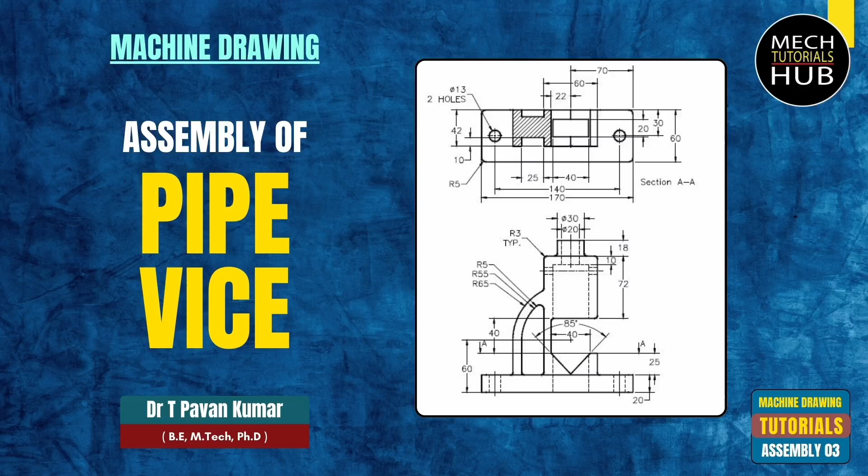Hello friends, in today's session of machine drawing video lectures, I would like to start off with a component called pipe vise, which is very important assembly when it comes to machine drawing.

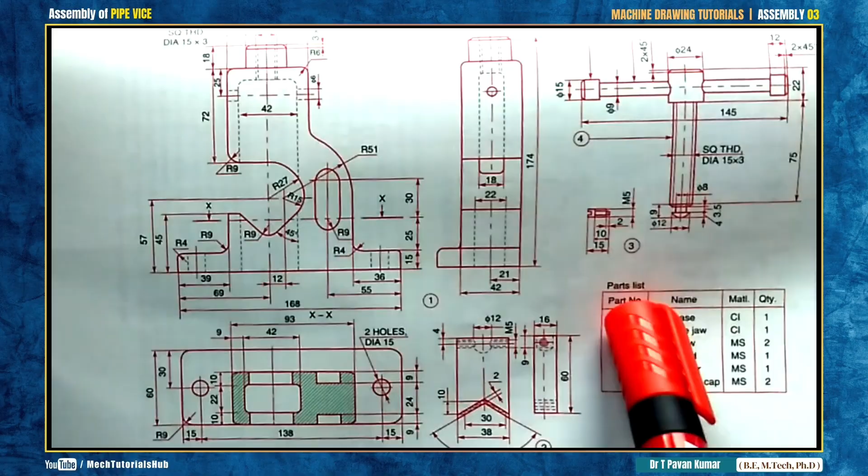Now here you could see the question. All the components will be given to you in the examination. Complete sheet will be given to you in the form of a question with all the dimensions given, even the table also.

Only thing is, the way we have seen in stuffing box and screw jack, what we need to do is figure out how to assemble the components in its working position, which is more important. We need to concentrate on a few things.

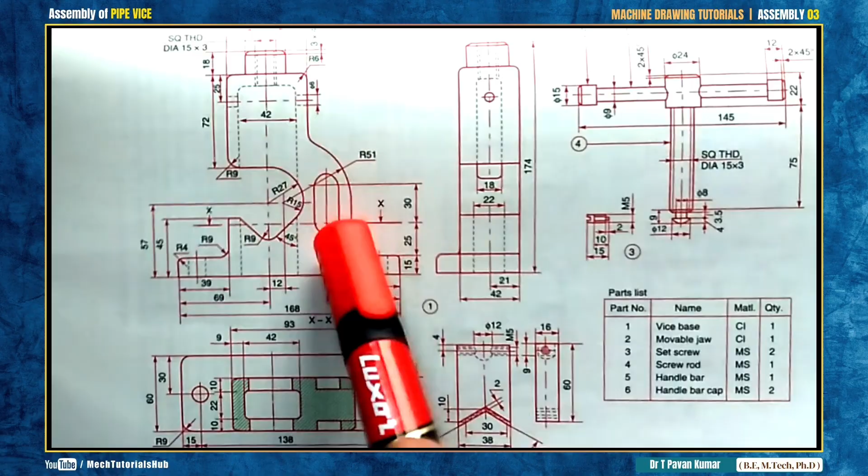Now as I said initially, whatever the assembly may be, we need to draw part number 1 first, which is the major part. Then comes the other parts, which will sit with respect to dimensions in its working position.

Have a look at part number 1. There are many dimensions given, many dimensions, somewhat clumsy. All the dimensions are clumsy.

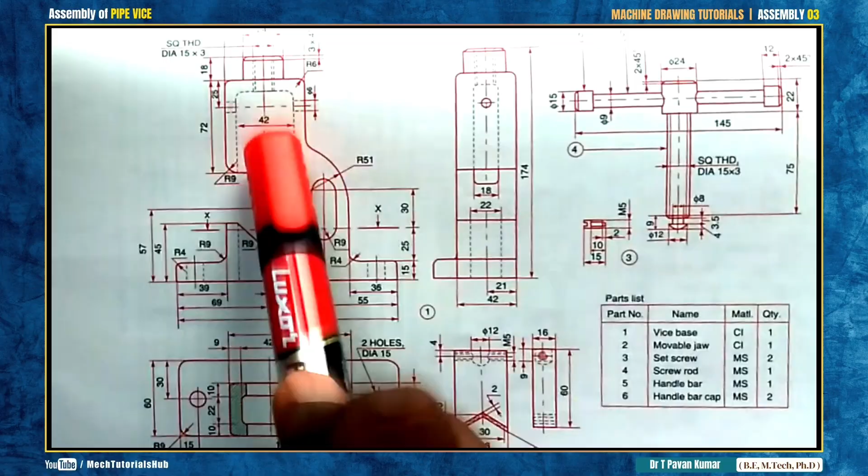So here you could see the internal diameter, minimum internal diameter of 15 by 3 for this component. There is a minimum internal diameter of 15 by 3. Do you have any other component which will match with this particular 15 by 3?

That is more important. Have a look at part number 2, part number 3. Is there any other component which will match with this particular slot?

Now here there is a hole, meaning we need to fix a shaft into it. Do you have any other shaft? Have a look at part number 4.

Now this part number 4 is having a shaft of diameter 15 by 3. This 15 by 3 is again matching with 15 by 3, which is having a length of 75, meaning this 75 is going to insert into part number 1.

If you want, you can insert completely 75, or else it could be some number like 50, 45, 40, 30. It is not compulsory that you need to insert completely 75 inside part number 1.

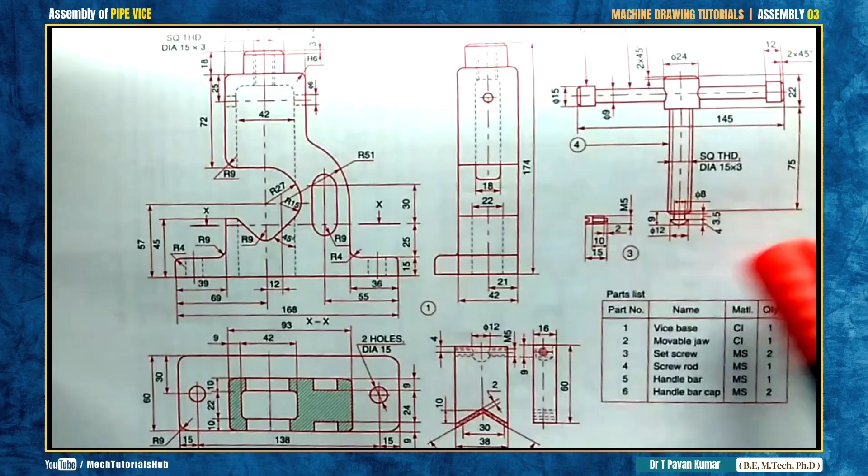And one more thing is, have a look at part number 4, bottom critical portion. Here have a look, there is a dimension called 8 dia, 9 thickness, 12 dia, 3.5 thickness, 4 thickness. Many dimensions are given here.

So have a look at part number 2 again. Now the same dimensions are followed in this case also. There is a diameter of 12, and again there is a thickness of 5, thickness of 4. So these two are matching with each other.

So the profile is also matching. The complete profile is also matching with this particular profile.

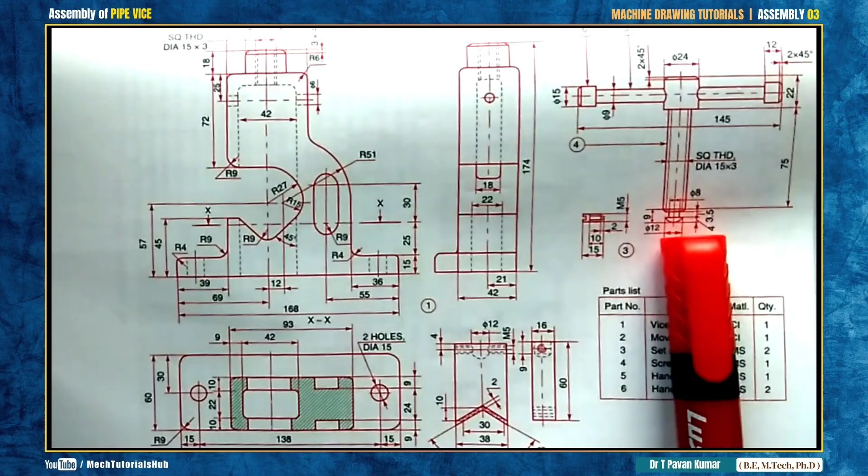So what you could do is take this plate, part number 2, which is the movable jaw. Take this jaw, place it here, which is already inserted inside part number 1. Part number 4 is already inserted in part number 1.

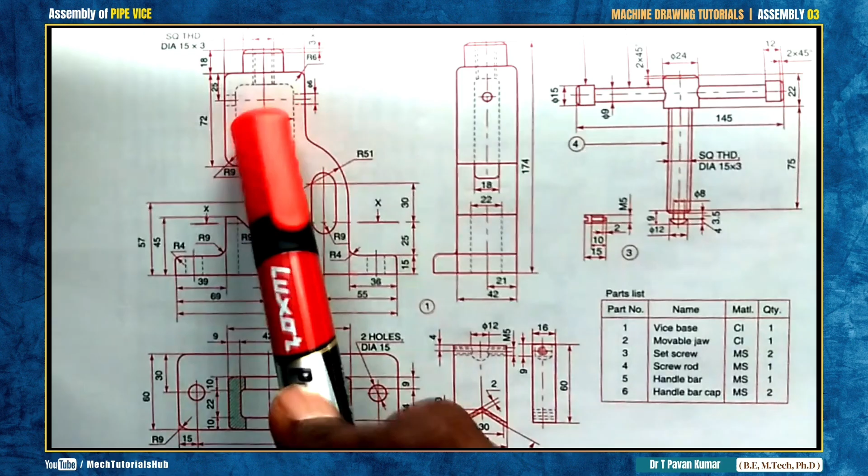What you need to do is take this part number 2 from the bottom, take it up, try to align with part number 4. After aligning, you have to fix it.

Have a look at part number 3, which is a set screw. What is the quantity given? Set screw quantity is 2, so one from this side right, one from this side left.

If you place the set screws, part number 2 is going to fix to part number 4. Try to understand: in part number 1, part number 4 is going to insert.

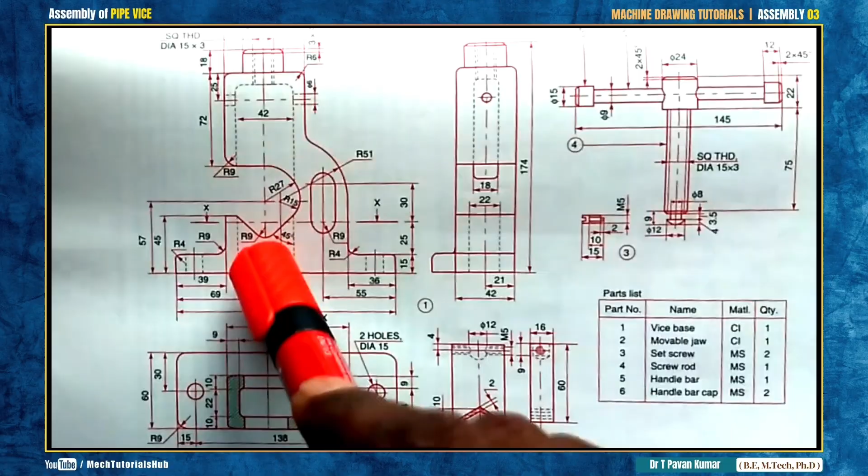After inserting, take this movable jaw, place it from the bottom, align with part number 4, and try to fix these two with the help of the set screw. This is an assembly, this is your assembly.

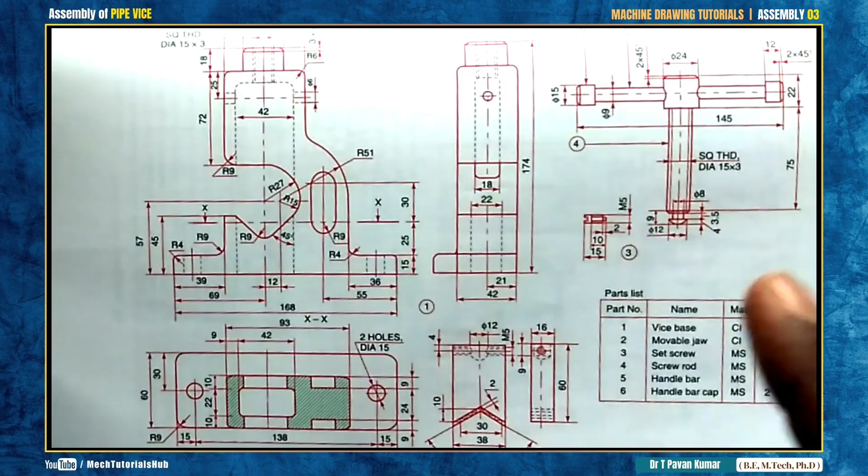Now we use these two levers. You could see a lever in part number 4, where we'll try to rotate it to fasten and unfasten, to move up and down, the way we have seen in screw jack also.

Now here you could see part number 6, handle bar cap, handle bar. These two handlebars are used to rotate, just by holding with the help of hands. If you rotate, what happens? It will come down and move up, where you can hold the pipe, circular pipe, with the help of this jaw.

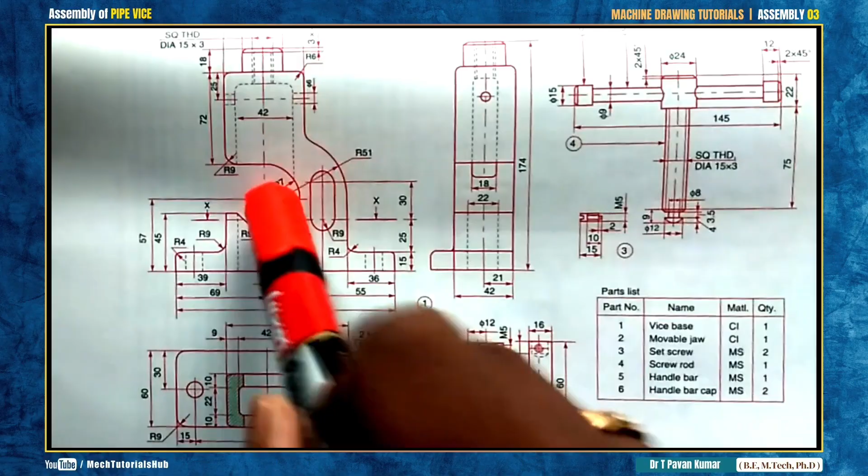With the help of this jaw, you can hold the circular pipe to make threadings or to wind some other thread onto the pipe inserted. Okay, this used to hold the circular pipe.

Now we'll see how to draw this particular 2D sketch, like front view and top view of an assembly. As I said, we are going to draw a pipe vice. Now, I don't go in depth the way we have discussed before.

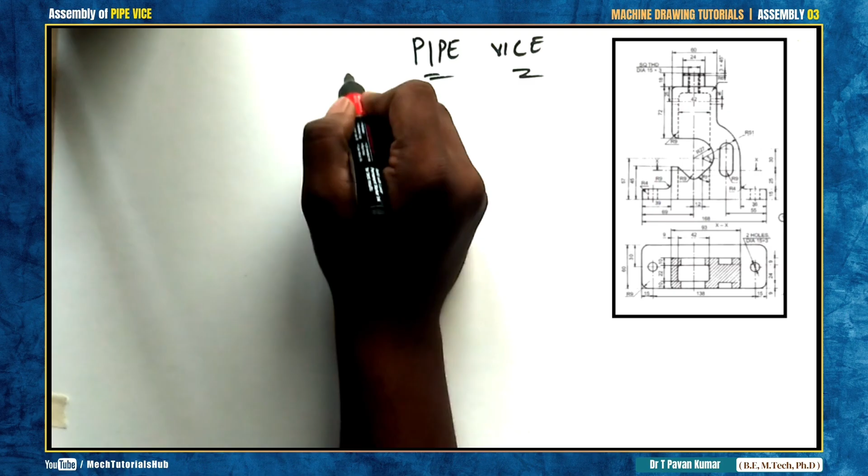We need to draw a vertical axis line followed by a horizontal. Now I'll take part number 1. Bottom one, I'll start from the bottom of part number 1, and place the bottom line over here. I'll imagine that this is going to be the base of part number 1.

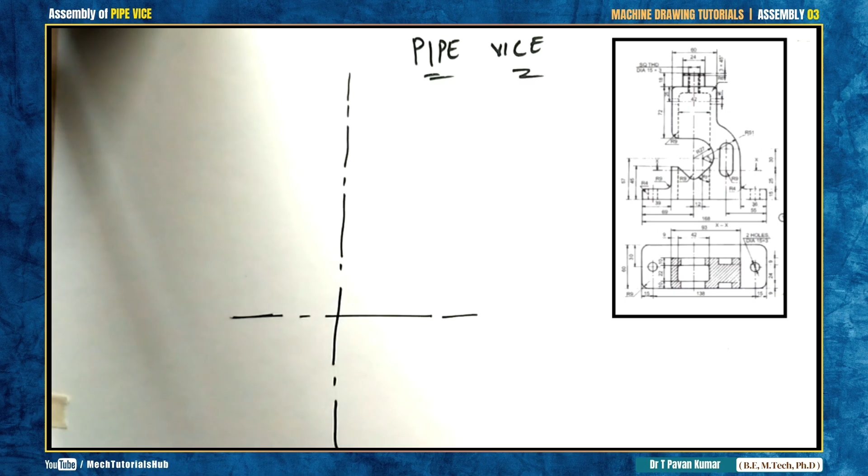The dimensions given are 168 overall width, bottom width of 138, followed by a thickness of 15 mm. So I'll try to split this 138 into 2.

Have a look at the top view, 138 is given. And have a look at the front view of this particular pipe vice, where you could see the axis centrally placed. Is it symmetrical or not? That is a question mark. Now from the left corner there is a dimension maintained which is 69.

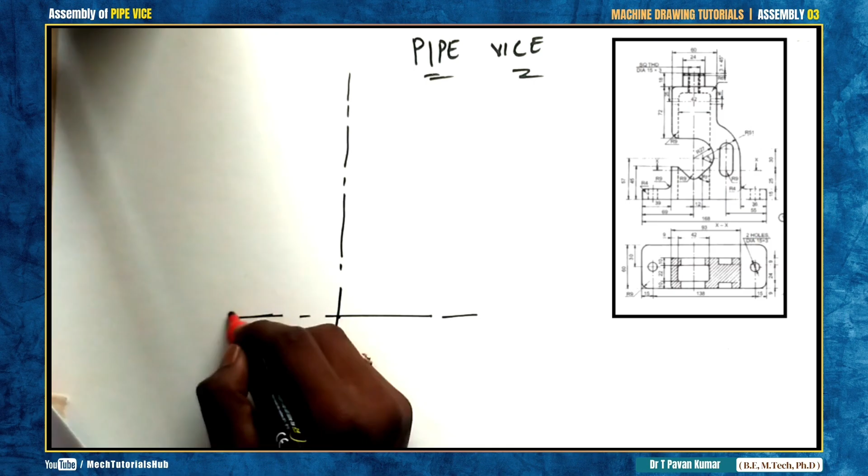From the left corner till the center it is 69, already given. Take the dimension to draw the vertical axis. So already the vertical axis is placed from the center till here. I'll try to make a mark of 69, which is given in the question, till here.

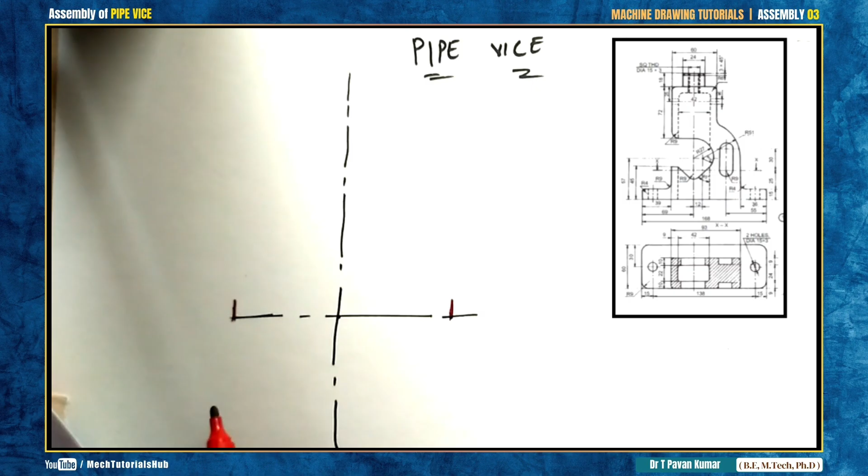Having a width of 15 mm on both sides, so if this is 69, the remaining portion of 168 you need to place here. If this is 69 out of 168, the remaining you need to draw to the other side, which is 15 height again. Then there is a width of 39 given from the corner.

39 given from the corner. There is a height again given from here to here, it is 45. So measure from here till here, it is 45. Draw the line. Then there is a thickness.

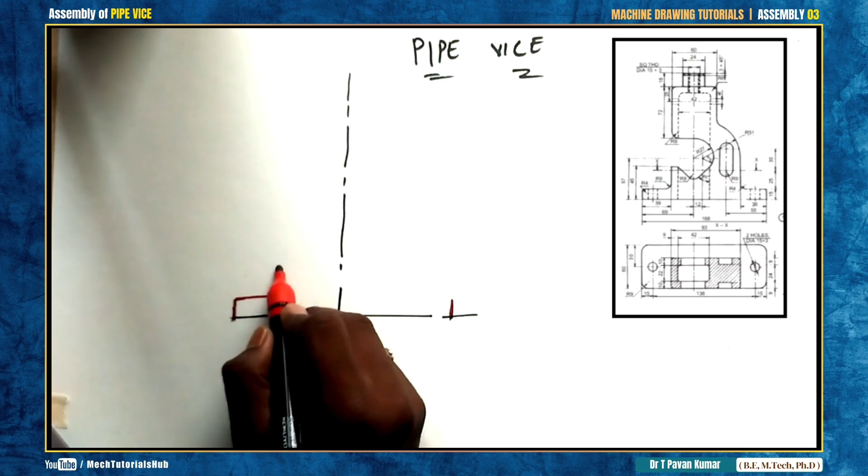How much is the thickness? 9. Have a look at the front view, R9 is given above that. So if that radius is 9, this will also maintain 9.

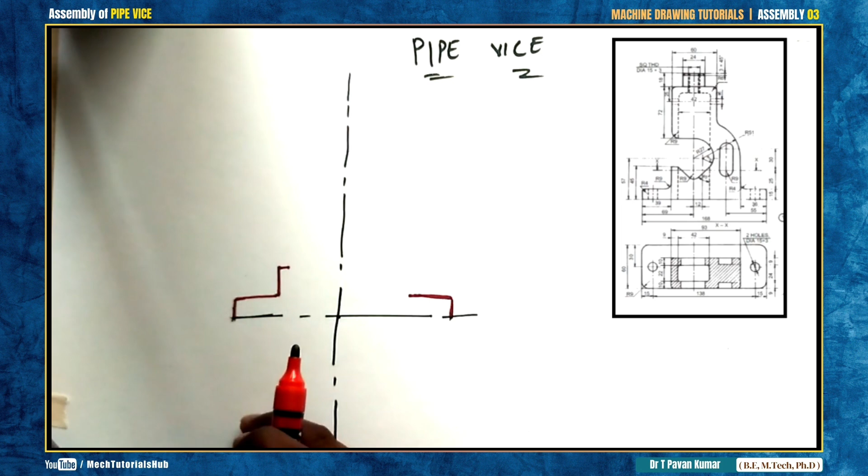Now we will try to place the height, overall height. Similarly to the other side, 15 is given. Again 36 from this corner till left, which is given in the question. Then from the bottom till the top of the front view, the overall height is 174, given in the side view of part number 1.

Side view of part number 1. So from here to here I'll make a mark of 174, for example somewhere here. Now I'll start from the top, where dimensions are given already as 24 by 60.

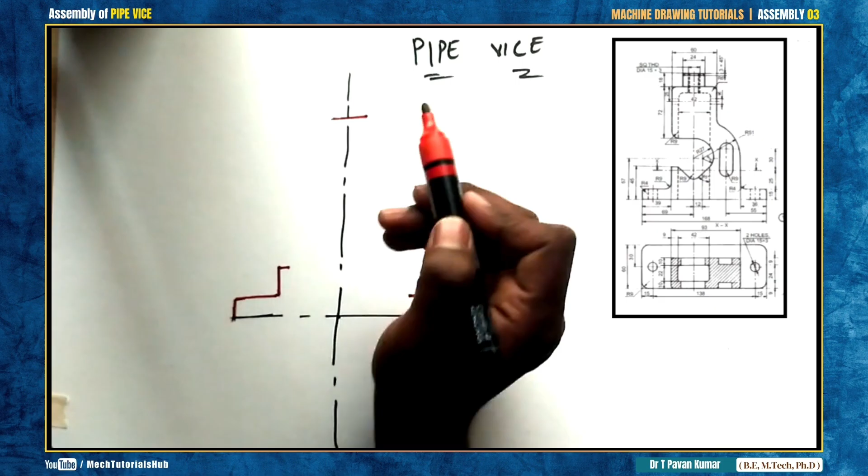24 means 12 on both sides, again having a depth of 18. Then again 60 means from here to here 30, close it, 60, which is given in the front view. Now this 60 line has to match with this point.

So I'll try to enlarge this. From here to here 30, here to this point again 30. Imagine that this length is 60 now, complete length is 60. Now this vertical has to be aligned with this line.

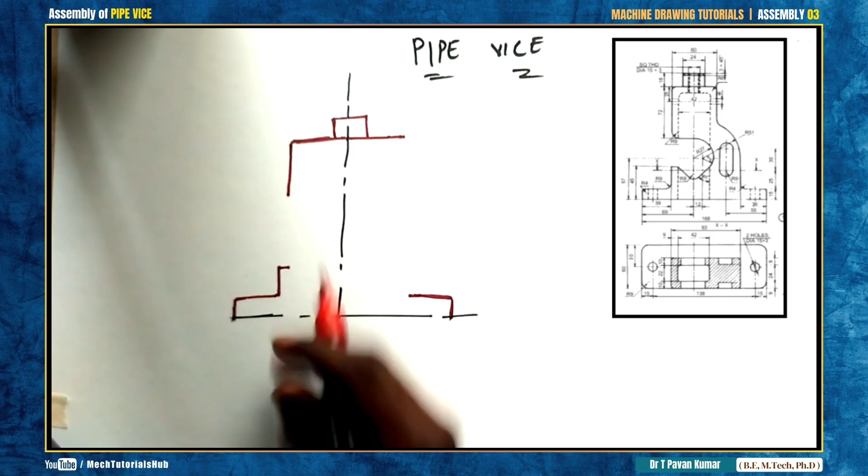Up to what distance? Already the distance is given. After this 18, it is going to be how much? 72, already given in the question. For example, here till here it is 72. I'll try to extend the line till here, it is 72.

Similarly, this line also we need to extend. Till what distance? Till some infinite distance. Later on we'll see how to join those.

After this, again what you need to do is draw the hidden line in between, maintaining a gap of 9 mm. Draw that hidden line. Overall it should be 9, that needs to be maintained. So the gap is 9.

After drawing this, again try to place the center here, on the vertical try to place the center. How to place the center?

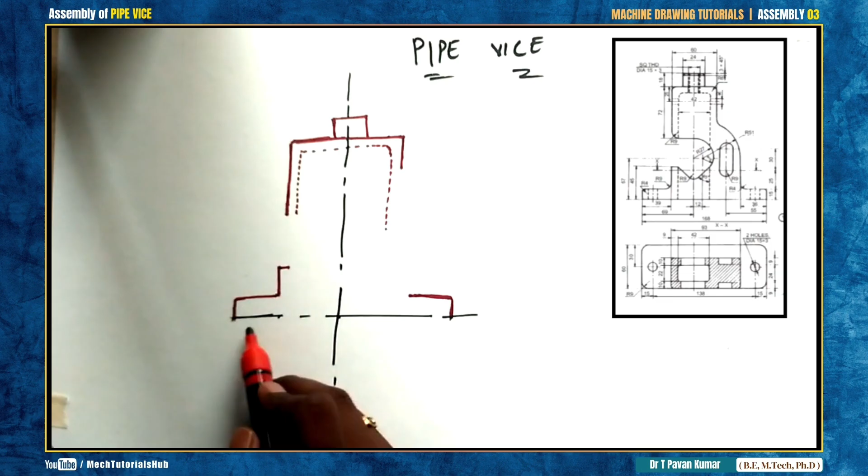Already we have marked 45 from the baseline. Again you need to mark one more position, which is 57 from the base. From here make a mark of 57. This 57 is very much important to draw the arcs.

Now what I try to do is, from this center there is a radius of 27 given. Just try to draw a quarter circle, not a complete circle.

Then again there is one more axis line which is beside the actual axis line, maintaining an offset of 12 mm. I'll try at an offset distance of 12, and draw one more axis line. I'll match up this 57 point here also.

From here again one more radius is given, which is R15. I'll try to draw this R15. I'll join this R27. Then again R15, so R15. These two are important again.

Wherever we got R15, you need to draw a tangential line from there. How to draw the tangential line? We'll have a look. Now for example, this hidden line is continuing till the bottom.

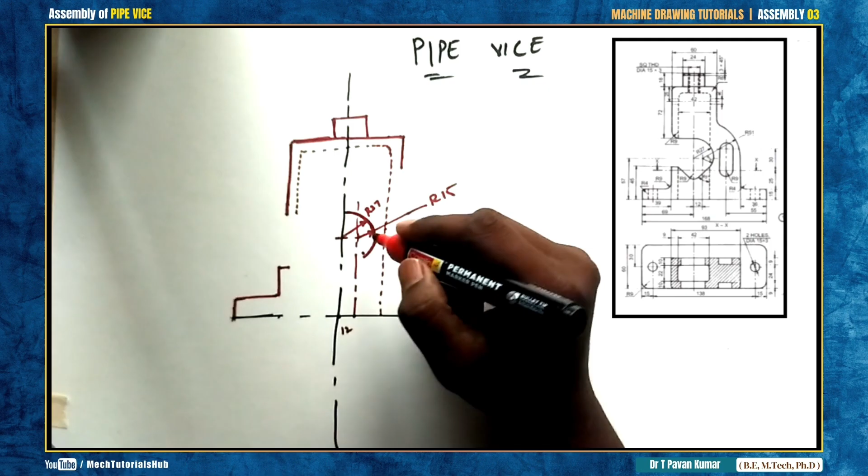Now align your drafter to 45 degrees. Try to match up with this particular curve, with this curve, tangentially. Now, if you tangentially draw a line, it will come and meet the actual axis line somewhere.

Again, here, from here, draw one more 45 degrees line. Maybe it is not exactly 45. I am trying to manage simply like this.

Wherever you got a sharp end, try to make it R9. So 9. Then again, join this. This is going to be 9 again. Join it something like this.

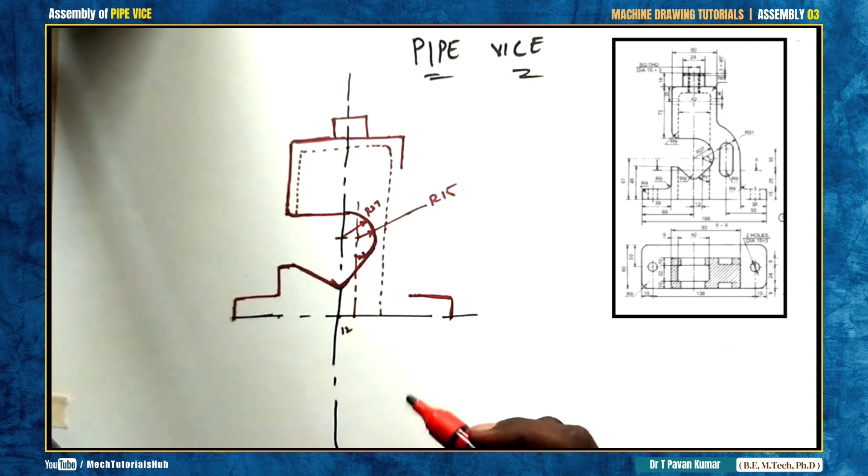Again, from the same center of R15, from this point, measure a radius of 51, an arc, something like this. Not a complete circle or a semicircle, draw an arc, something like this.

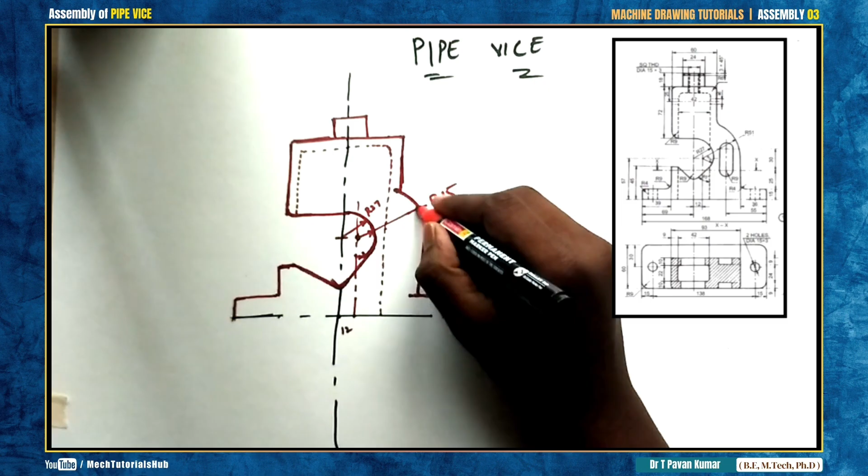Now extend this line till the arc and extend this line till that particular arc. Make it smooth. This is how you will get a component. And darken the bottom base. The component is going to be something like this, roughly.

Now try to place all the dimensions. What are those? This is maintaining how much? 15 mm, and this height, it is maintaining 40, center maintaining 57 dimension.

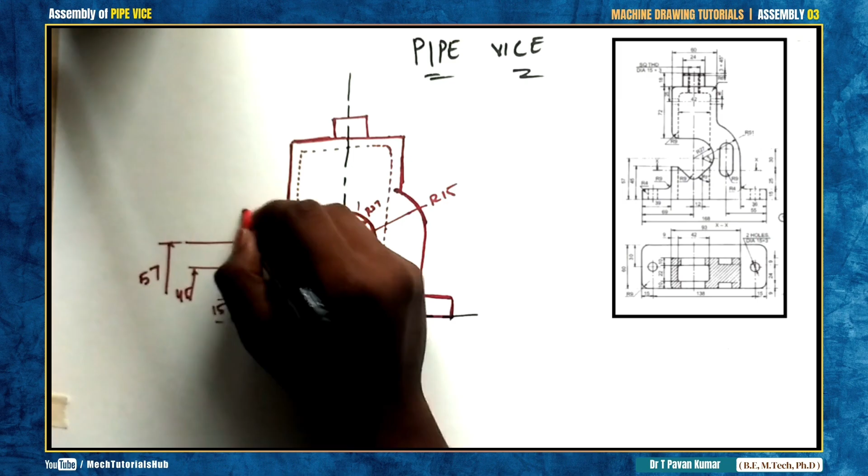Then again a radius, this is maintaining a radius of R9. And this is having a height of, this we have taken it as how much? 72, and this we have taken as 18 dimension.

Likewise, place all the dimensions given in the question. Now this part number 1 is having an internal hole, circular hole. Have a look, there are hidden lines given, 15 by 3, something like this.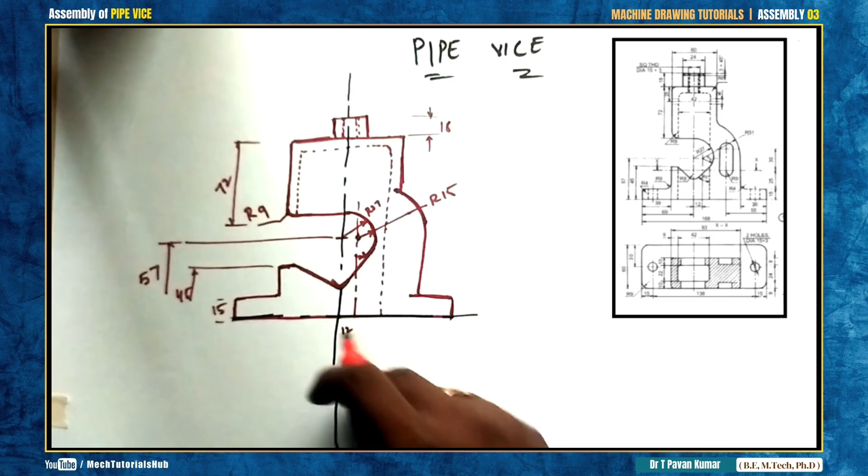Now take part number 4, try to place it from top to bottom until that horizontal matches with this particular horizontal. When you place it, what happens? It is going to sit something like this. Part is going to sit something like this. Try to look at part number 4, you will understand.

Then again we need to draw a handlebar, something like this. Whatever dimension is given, accordingly try to draw the handlebar with the help of a scale or with the help of a drafter always. Again one more side handlebar with whatever the dimensions given.

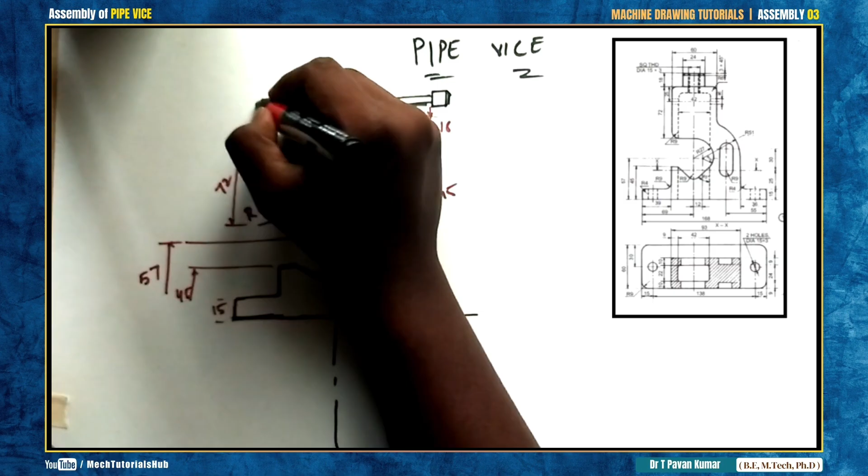Then again 45 degrees, maintain with a gap of 2 mm, close it. This gap is 2 mm, maintain an angle of 45 on both sides. Again 45, close box, something like this.

Now it got inserted completely up to 75, so you can make it invisible till this line, till this particular line. Now after this line, if the component comes out, make it dark and try to get that shape, close it.

There is a diameter of 8 with this kind of profile. Whatever the profile given, try to draw the profile with the help of dimensions. This portion is very much important. Try to understand, this portion is very much important.

Now here it is maintaining a width again. So where you can place your component number 2 from bottom to top. So I forgot to draw a hidden line here.

This hidden line will get continued somewhere here till the bottom. So there is a hole from top to bottom.

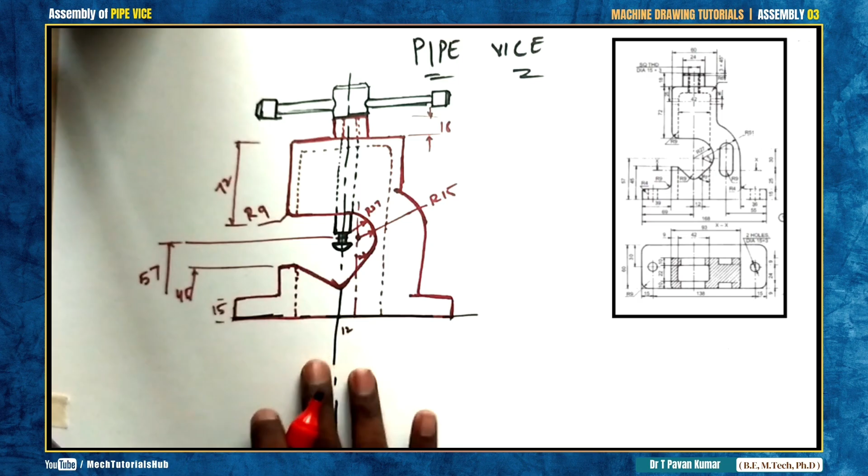So what you could do is now take part number 2, place part number 2 from the bottom. Part number 2 is going to be something like this, only a rectangle, a simple rectangular piece you are going to place, of whatever the length or height given.

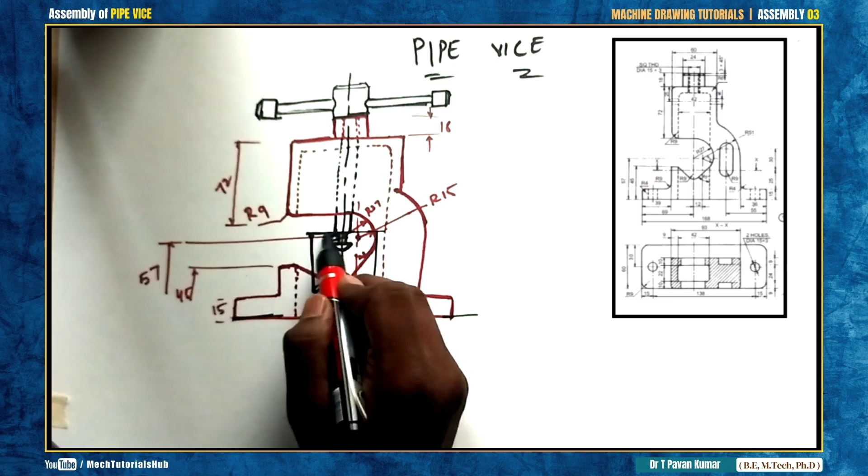Then again a 45 degree line, 1, 2. Parallelly draw one more line with a gap of 2 to show that gripping, like a hatch kind of thing. Then a set screw. No need to make it visible, just show the profile or shape of the set screw, whatever shape they have given in the question, simply.

Here is the assembly. Part number 1, this is what part number 1 is, make an arrow, fine. Then again part number 2, again an arrow. This is some part again given in the question, and similarly this is one more part given in the question.

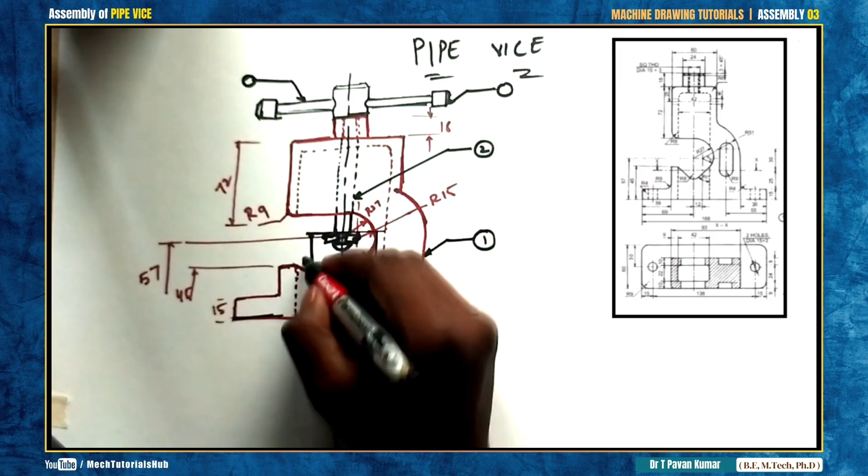Number them all. Then always try to place the dimensions with a 2H pencil. Diameter of 24, whatever the dimensions given, try to place all the dimensions with the help of a 2H pencil.

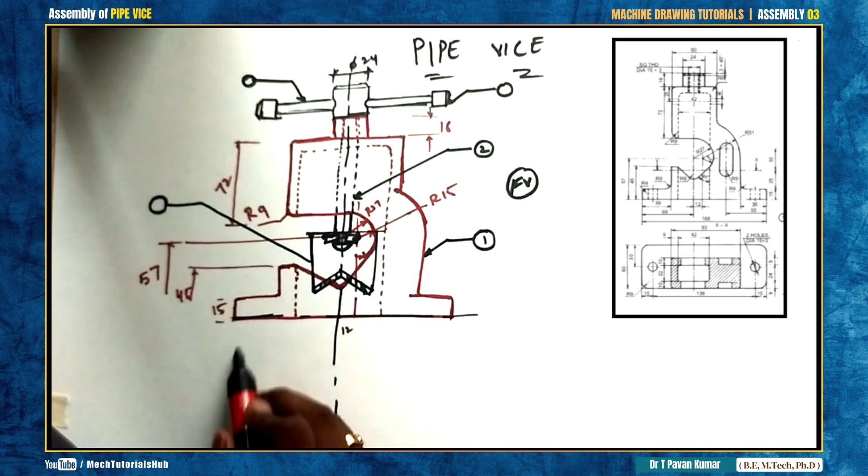Once you finish off your component, front view, this is your front view. When you view from the top, what you could see is a diameter of 24 followed by a rectangular piece. Have a look at part number 1 top view. So the part number 1 top view is going to be something like this, followed by a box kind of shape, something like this.

Now whatever profiles you have over there in the top view, you need to place those. Then again from here there is a circle. Whatever the profile, almost the same thing is going to come here. I'm trying to match up with the figure, simply to make you understand.

It all depends, again, on hatching, whether to hatch the component or not. It all depends on the question given to you. If he asks you to draw the sectional view, half sectional view or full sectional view, accordingly you need to section the component also. If not, no need to hatch the component.

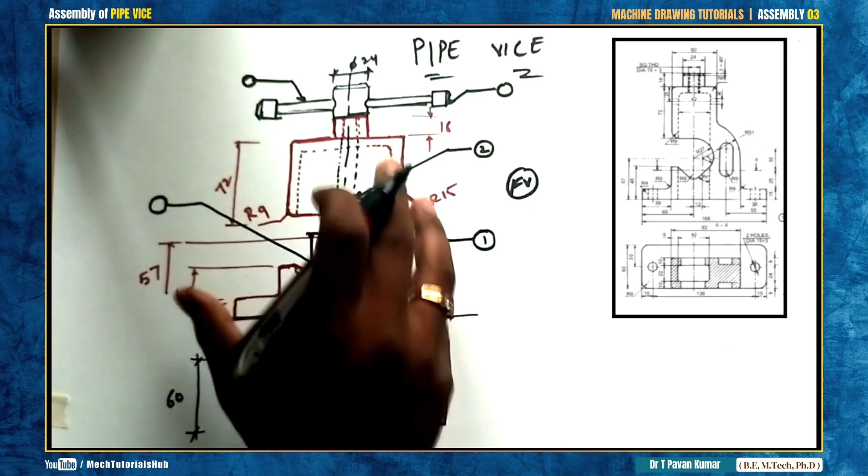These two holes, hole 1 and hole 2, are there to fix the complete setup on a foundation, some wooden table or something. Drill holes to fix it to that particular wooden table, with the help of 2 bolts or nuts. That is the reason we make 2 holes.

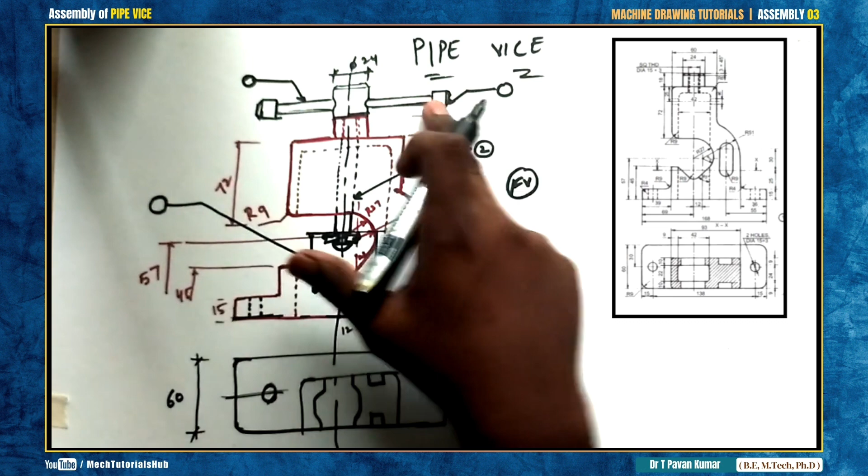Then followed by this, this is only the top view for part number 1. Once you assemble the component, there is one more component existing between the observer and part number 1, which is this handle. So that handle can again be seen from the top, which is a diameter of 24.

That diameter of 24 will come here, followed by a bar again. Now whatever distance you maintain here, the same distance needs to be maintained, followed by a box. Bar, same bar, followed by a box, something like this.

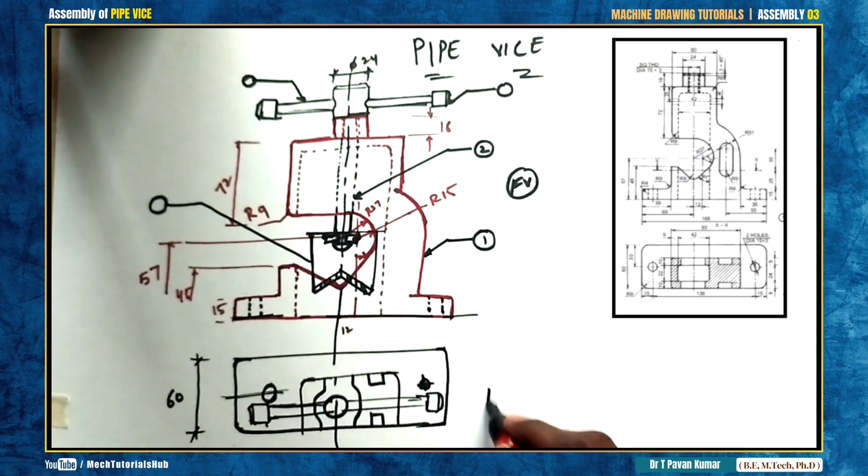So this is your front view, this is your top view of the pipe vice, where the pipe vice is used to grip the circular object to make threadings on the component or do some other operation on that particular component. So place all the balloons.

Then again, similar to the last lecture, try to draw the table given: serial number, name of the part, quantity, and material it is made of, as a table.

Then again write the scale, whether you are following 1:1 or 1:2 or 1:3. Mostly if the dimensions are less, we will go with 1:1, no need to represent. If you are changing the dimension from whatever is given in the question, you need to go with 1:2 or 1:3. We are scaling down the component which does not fit our exact drawing sheet dimensions.

And followed by, all dimensions are in millimeters. These are the units. Never show units followed by a number, never show that on the drawing.